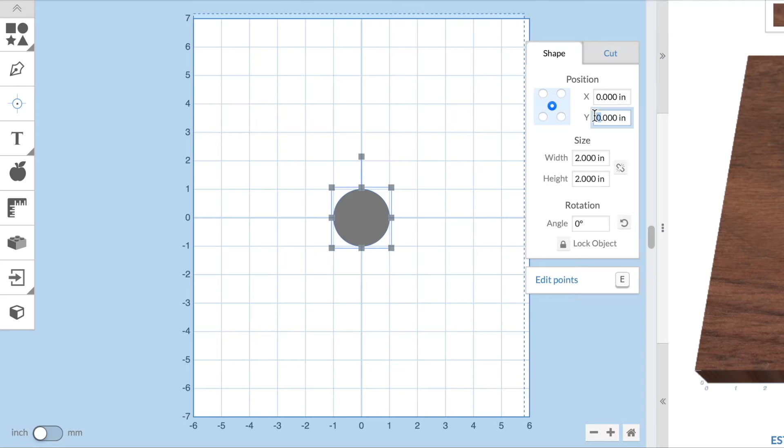I'm using Easel Pro for this. I'll start by pulling a simple circle in, adjusting the position a little, and then adjusting the size to be 3 inches in diameter. Then let's go to the cut and set that to a 1/2 inch deep and make sure it's set to clearing out a pocket.

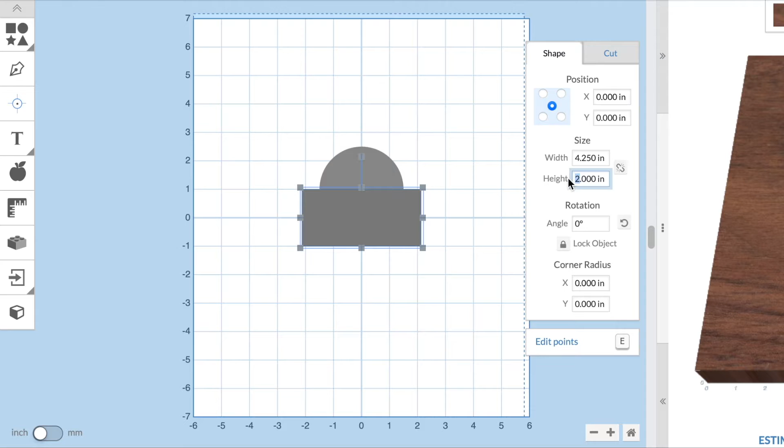Now I'll bring in a square and turn that into a rectangle that measures 4 1/4 inches by 6 inches. Again, setting the depth of cut to a 1/2 inch deep and changing the cut path to cut outside the shape path. Back to the shape to adjust the corner radius. The X value is going to be set at 1 inch and the Y value at 2 1/2 inches.

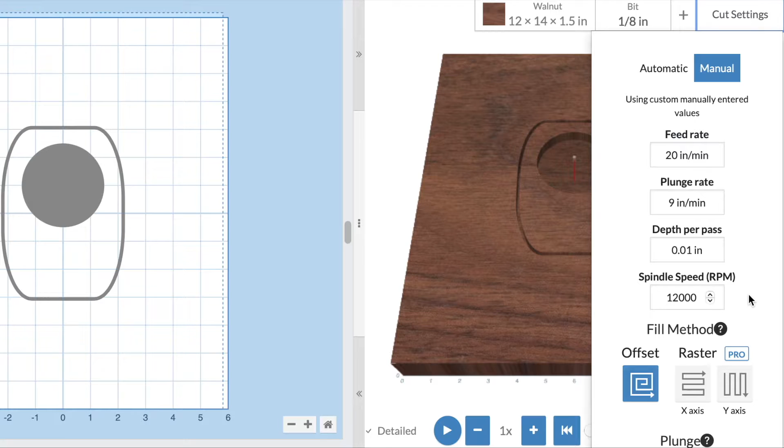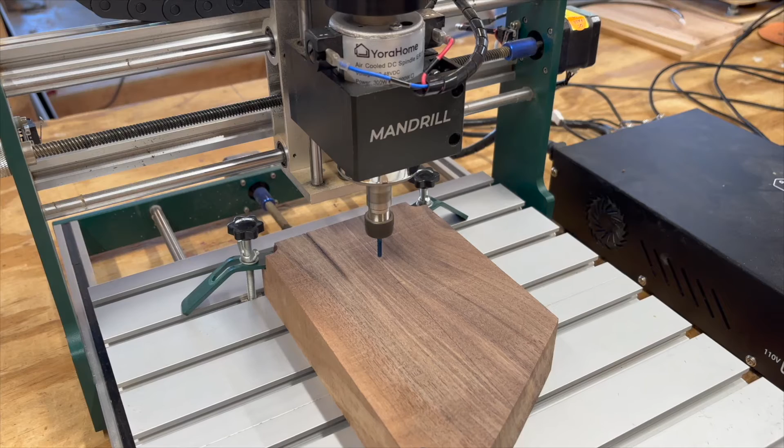Moving over to the cut settings, I'll be honest, I'm not sure what the ideal feeds and speeds should be, but this is what I'm trying. Let me know if you have any suggestions on feeds and speeds for a spindle with a max RPM of 12,000. So I have a total cut time of 6 hours and 30 minutes, which does seem pretty slow for an object of this size. Anyways, let's go cut this and see how it turns out.

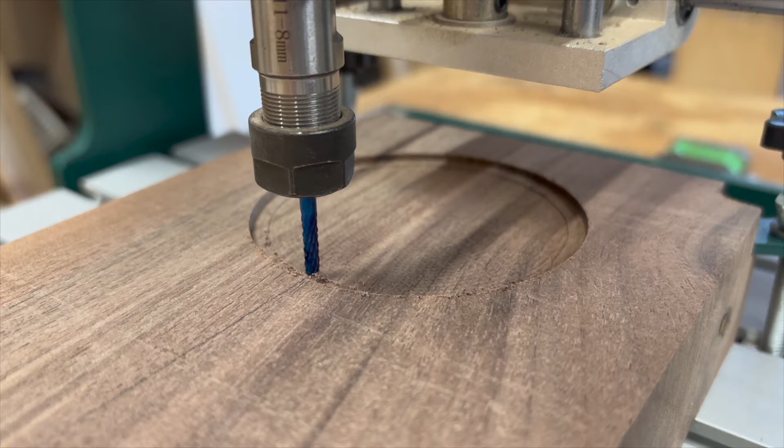I had a slight issue of it being too cold outside and my computer actually shut off mid-cut. I'll have to plane this down and move inside to try again.

In addition to this first design, I made 2 more that I thought would look good.

When I make more of these, to save some time, I'll just use my CNC to cut out the outside profile and then switch to my router combined with a template to cut the entire bowl portion. Before I cut these out, I'll use my router to get these to a final depth of 1 inch and then also cut that internal round corner.

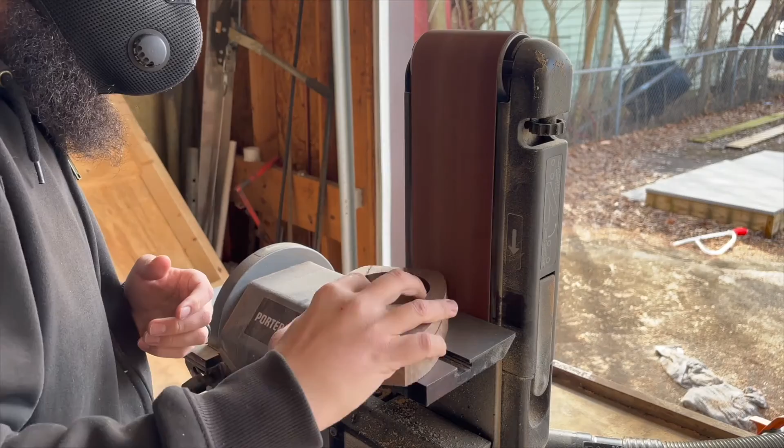I'm almost finished with these, but before I move on to the next step, I want to take care of the defect on this one. It has this decent sized split in it, and I just want to go ahead and try and stabilize that with some black tinted epoxy.